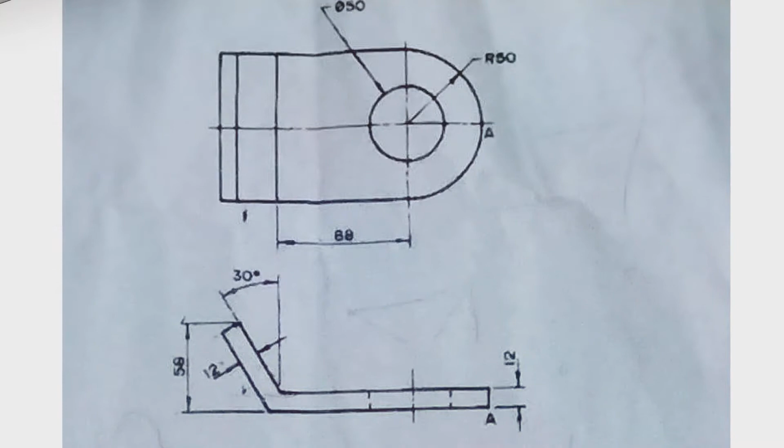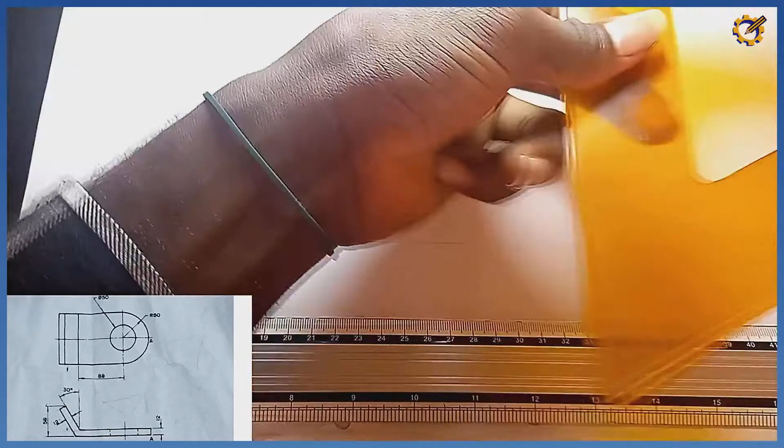Alright, so solving the problem on the screen, the very first thing we'll be doing is we produce a thin horizontal line. For this problem, we'll be applying the principle of isometric curve. After drawing my horizontal line, I'm going to project a vertical line in this order. After that, I'm going to produce my isometric plane towards the right and left hand side like this at 30 degrees. So I'm using the 30-60 degrees set square.

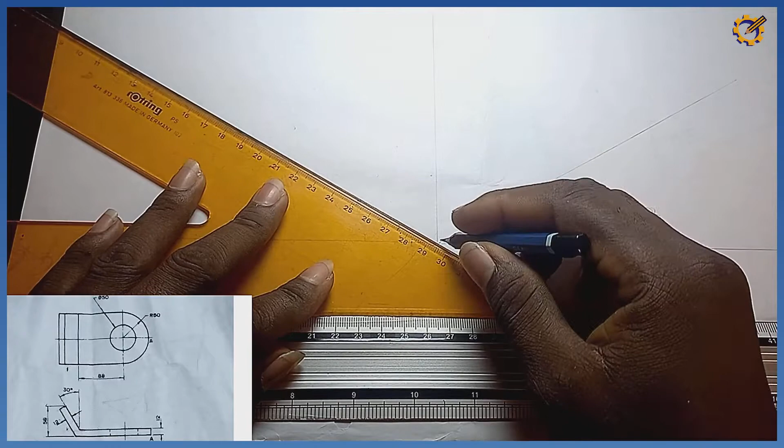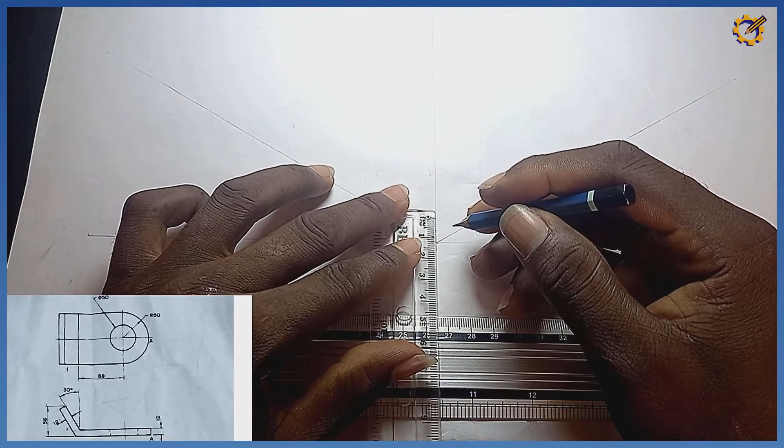So that is that about that. Then towards this axis also, I'm projecting this at 30 degrees also. After doing that, next is for me to pick my length. We take point A as our lowest point. So what does that imply? That implies that right here on this vertical axis, I'm measuring a mark of 12, which is this mark of 12 right there.

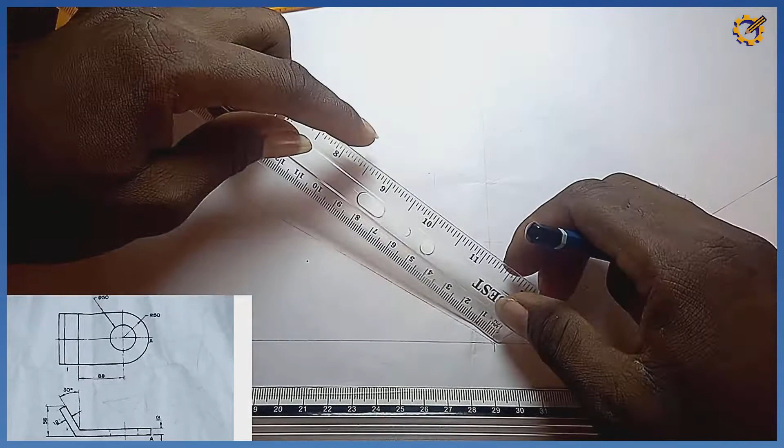Then towards my right hand side, I'm picking a mark of 100, which is this. I'm marking mark of 100, which is that. Let me also take mark of 50, which is this. Then towards my left hand side, I'm picking first of all mark of 88, which is this. Next thing is I'm going to pick my set square now.

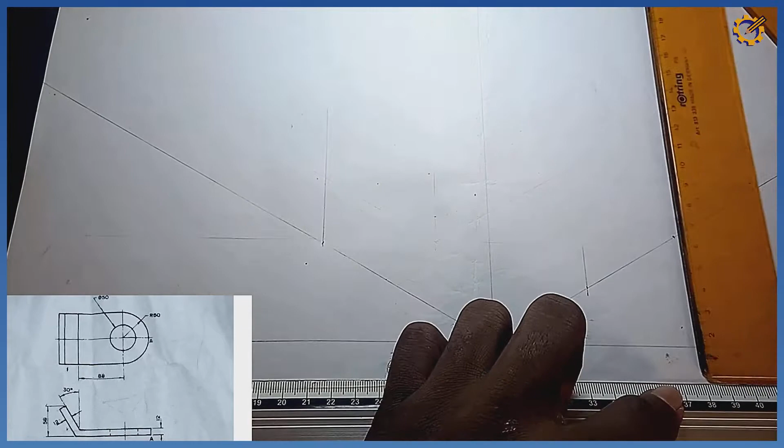So those marks I pick, first of all this mark of 88, I'm projecting that vertically like this. This mark of 50, I'm projecting that vertically also, and this mark of 100, I'm projecting it vertically. Likewise this mark of 12, I'm going to project that on my isometric plane like this. So likewise I'm drawing this like this.

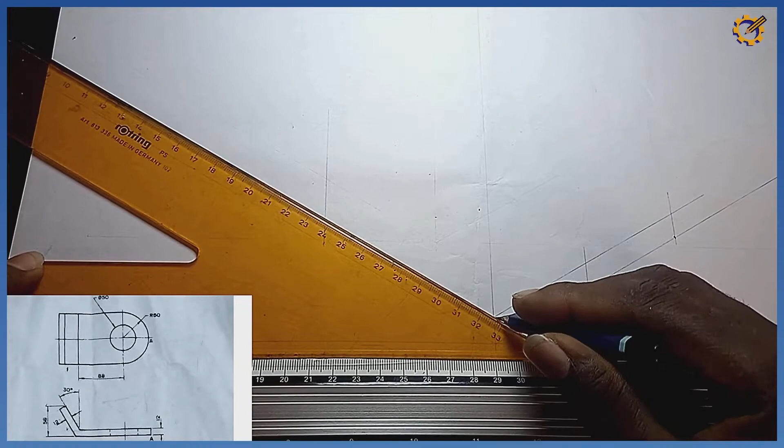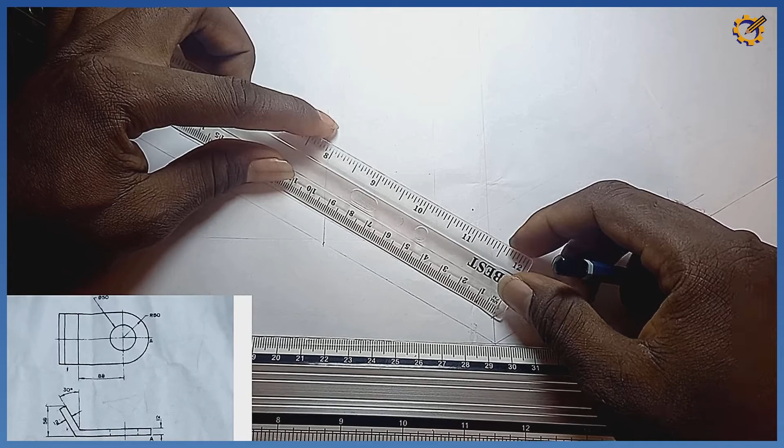In that order. So let's develop the circle here, the isometric curve here first of all. We are told that the radius of the circle is radius 50. So I'm going to pick my ruler. Towards this axis also, I'm going to measure 100. From here now, I measure 100 on this plane. Then in between 0 to 100, I pick mark of 50, which is this.

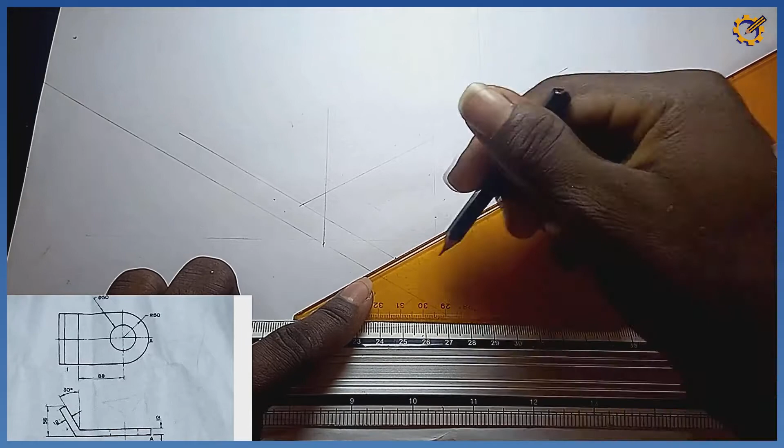Having this mark, I'm projecting them on the isometric axis. So mark 100 on this area like this. Mark 50 on this area like this. Then this edge here, from the end here, I'm projecting that also like this. So that is it over there. I need to erase this off. I don't need this, I'm taking this off.

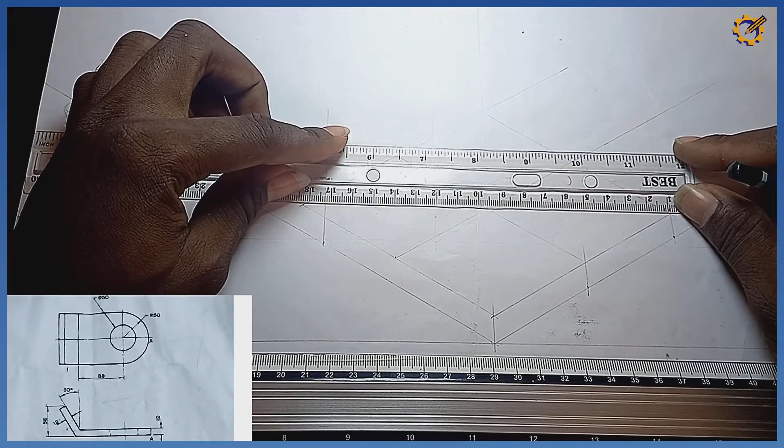What's the next procedure now? This midpoint here, I'm projecting it isometrically like this, with my 30-60 degree set square. After doing that, I'm going to pick my ruler. I'm going to join the longest diagonal, which is here to here. I will draw with thin line first.

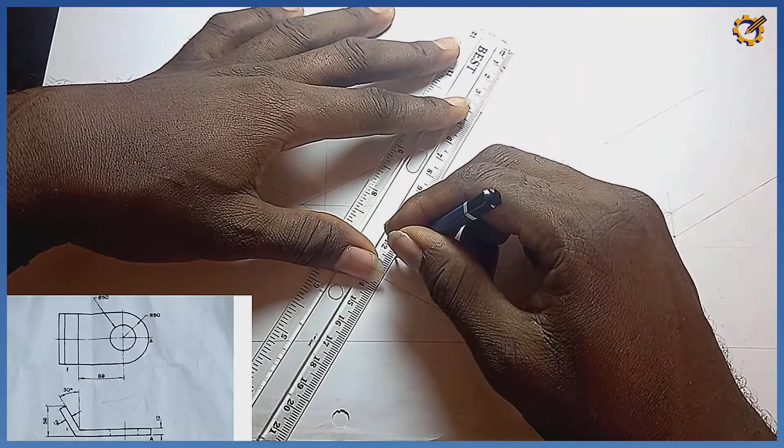After that, I'm going to pick my ruler also. From this edge here, from that intersection right there, I draw down here to the midpoint like this. You see that? Make it thin. Then from that same end, I draw to this area like this. After doing that, what's the next thing? The next thing is to pick my compass.

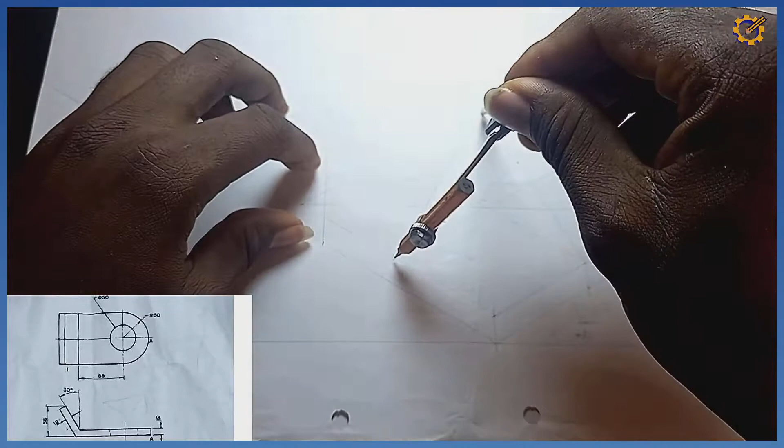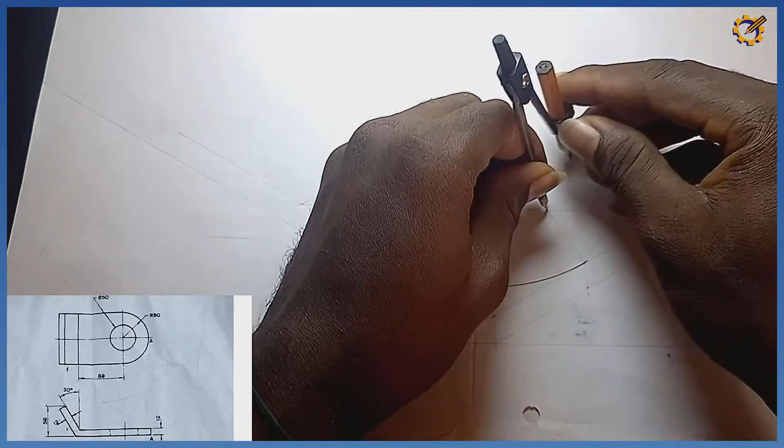Picking my compass, I sit right here at that junction. Then I turn my compass down here to this area, and I draw. Then at this intersection where my lines meet here, take note. Placing my compass right there, extending it to this area here, I draw as it is. So that area is settled at the top.

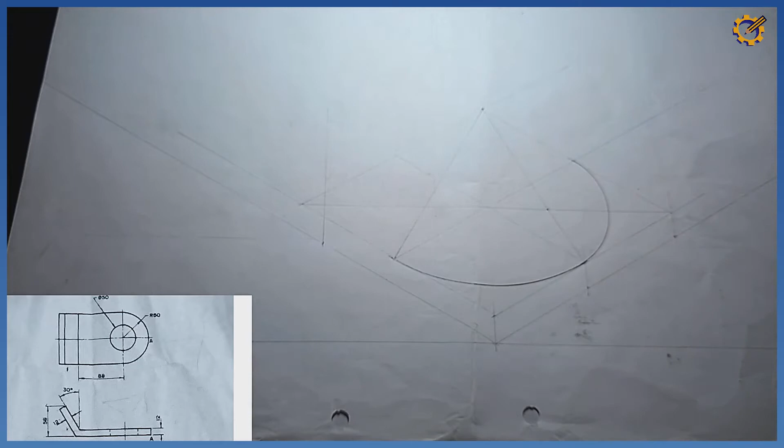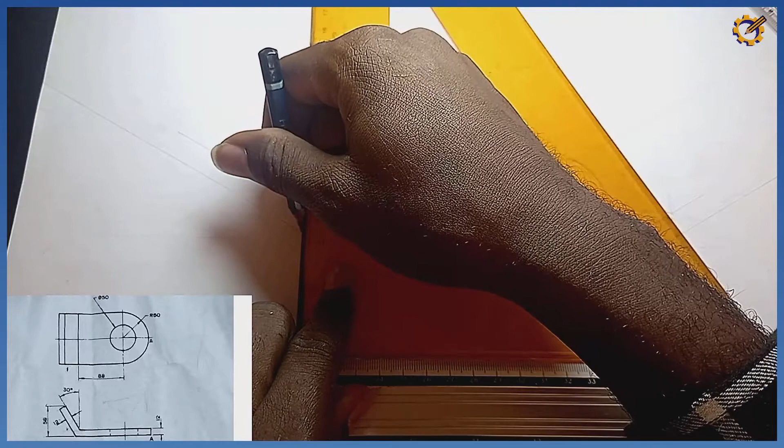So I'm going to replicate the same thing on the bottom part there. How do I do the bottom part? Just follow me. Picking my set square, likewise I'm going to project this point downward like this. I'm projecting this edge here also downward like this. Then I'm drawing this likewise like this.

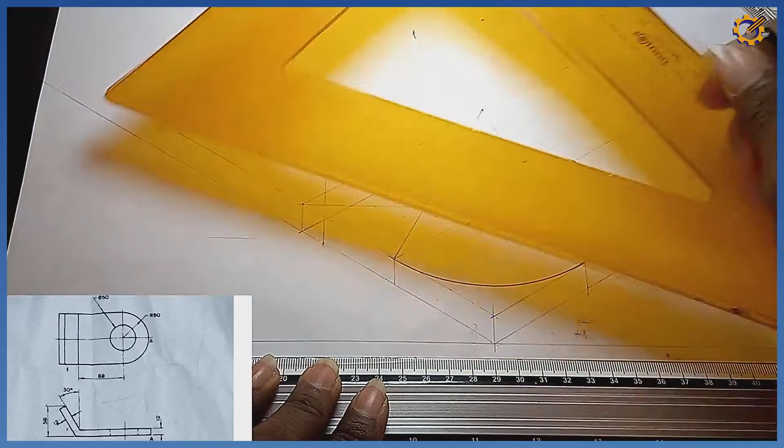Just take note of those things I'm doing. From this end here, you see the way I bend my set square, I'm drawing this like this. As it is over there now, I'm joining this also like this, and I'm joining this also like this, straight away to the back right there.

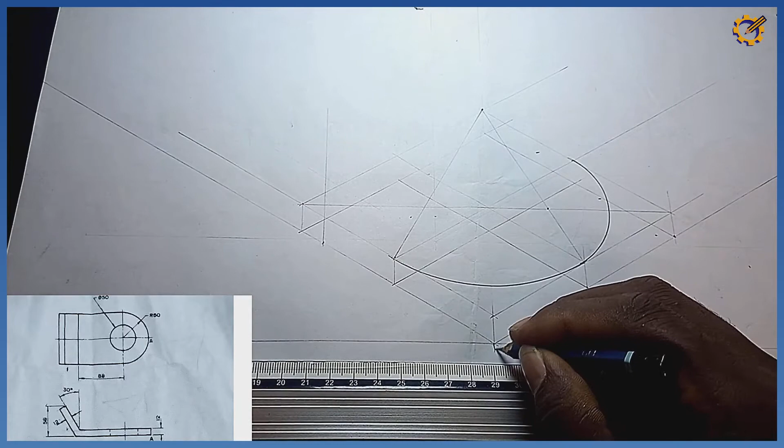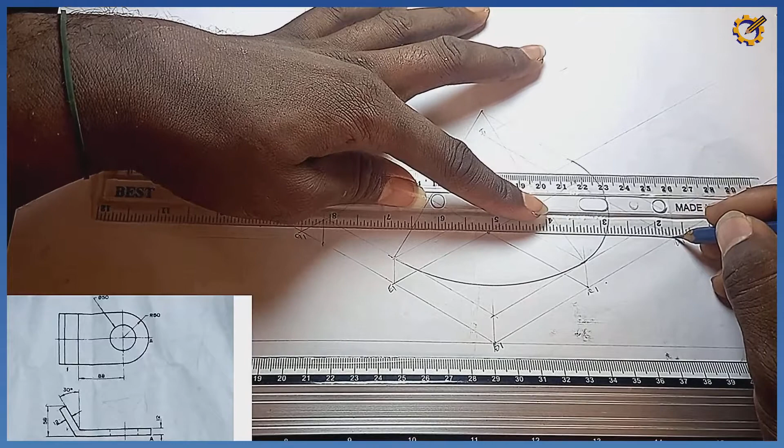After doing that, take note, I will call this area my B1, C1, D1, E1, F1. Take note of this midpoint. G1, H1, and I1. So I'm going to join G1 to D1, which is this. I join it like that. Take note of that.

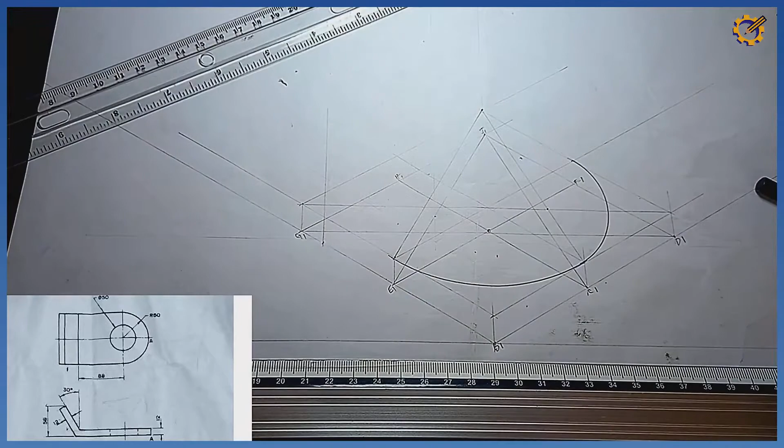Now I'm going to join F1 to E1, which is this. Then F1 to C1, which is this. What is the next procedure? I'm going to pick my compass right now. I'm going to stand at F1 to E1, which is this. Now I'm going to draw. Make it thick.

So I draw. Standing at, take note now, this line C1 to F1, where they meet right here at this junction. Take note, at this junction right here. Standing right here, extend my compass to C1. Then I draw.

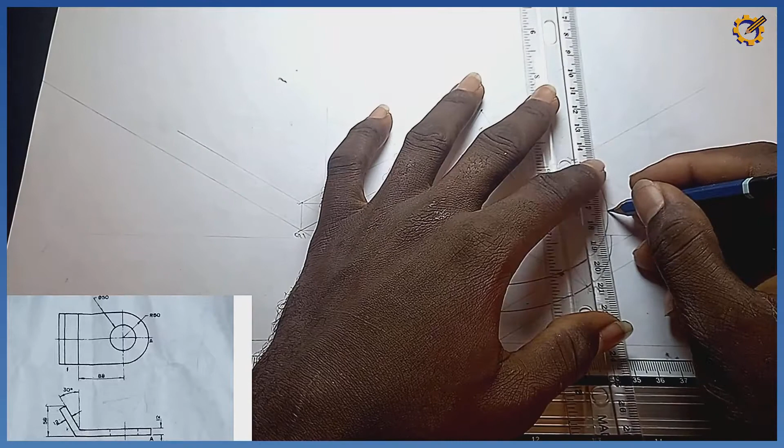So drawing it to that level, I'm going to join this to this with my ruler like this, straight. You see that? Like this. Okay, so that area is settled like that. So it remains the circle on the inside. So the circle on the inside is diameter 50. Diameter 50. So take note of this now.

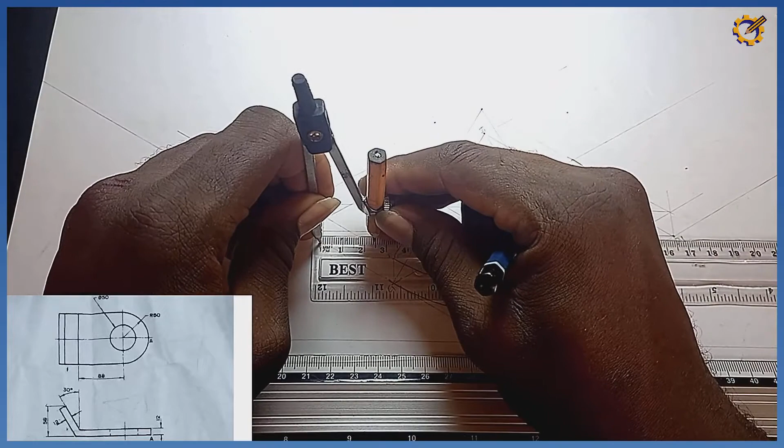I'm going to pick my compass. That will be radius what? Radius 25. I measure radius 25, which is this. With this radius 25 now, standing at this midpoint here. You see that midpoint right there. So standing right here, I mark like this. I mark towards the back also. I mark towards this area, and I mark towards this area. So do you take note of those points?

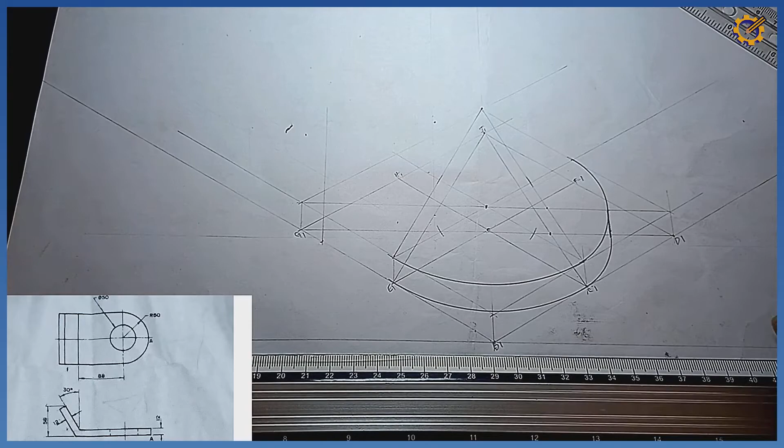All right. So the next thing is for me to pick my set square. Okay, picking my set square. So this first mark right here, this area here, I draw it straight away isometrically. All right, take note of that line. So you need to open your eyes very well so as not to make a mistake. So this second part, which is here, I'm going to draw down also isometrically like this. So take note of that line also.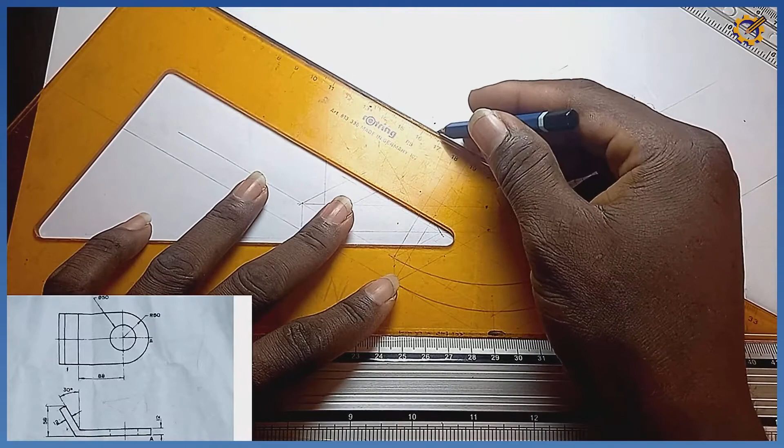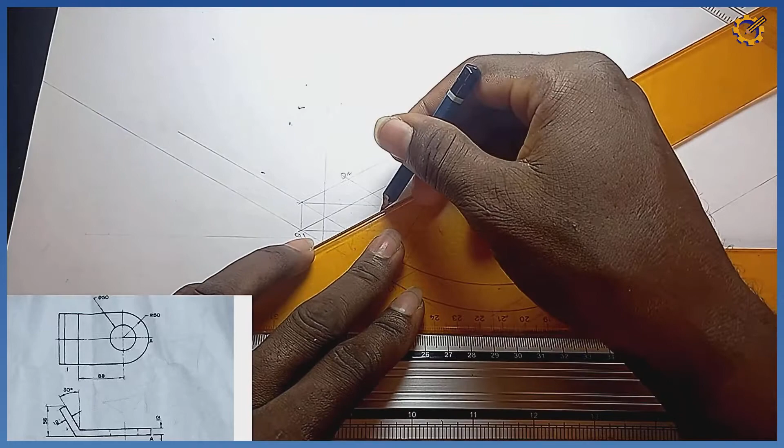So I'm having what? This, let me call it O1, O2. Take note. All right, then on this axis right here, where we mark at the back here, I'm having it here. And do you see that? So 3, then this mark that we mark here, I'm having it isometrically right there also to be 4. Okay, so this is it now. So let me help you to denote it on your own sheet over there. Please don't shade. I'm only doing this for you to take note.

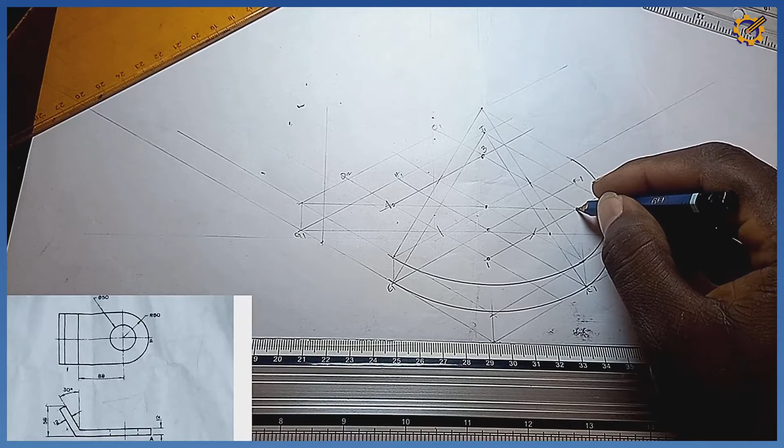So look at that junction, this junction, followed by this junction, then followed by this junction. Take note. So I can name it 1, 2, 3, and 4 for you. So do you see it now? So as it is now, we already have our longest diagonal joining it, which is here to here. Okay, so the next thing I'm going to do is name this point 5, 6, 7, and this area point 8.

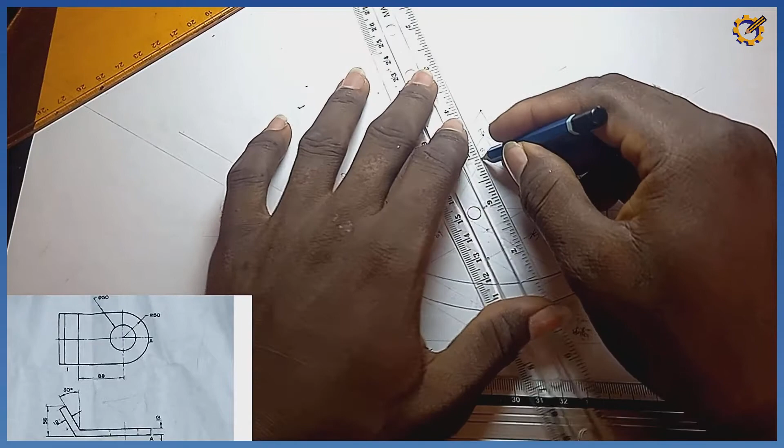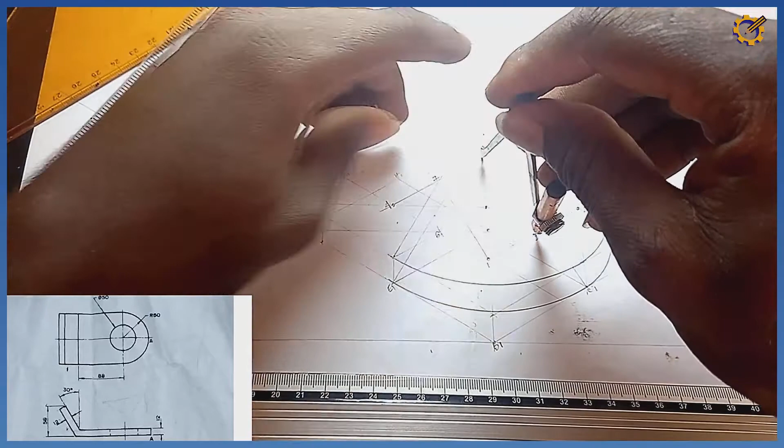Okay, as it is now, I'm going to join point 3 to point 6 like this. I'm going to join point 3 to point 5 also like this. Okay, do you see that? Alright, so I'm going to join point 1 to point 7. Now I'm going to join point 8 to point 1 also. So what's the next procedure? Now I pick my compass, I place it on mark 3, I extend it to mark 5 like this. So then I draw. Do you see that? I draw.

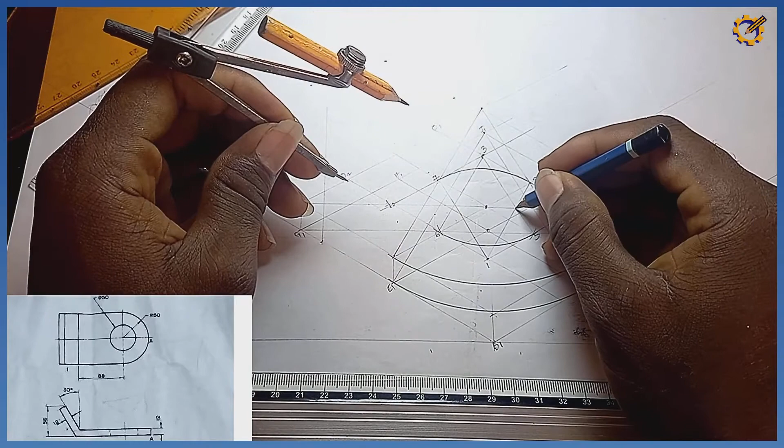So next is I'm going to stand on mark 1. Extend my compass to mark 7. So 7 to 8, I join 7 to 8 together. So then I stand at this junction. See this junction now? I stand at this junction. I extend my compass to point 5 right here. With point 5 I draw. Do you see that? I draw. Then I extend it to this junction also. And with that same dimension I join right there also, as you can see on the screen right there.

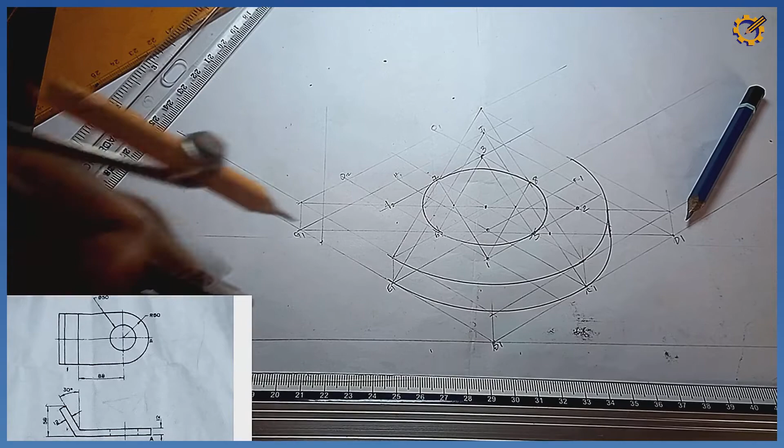Okay. So picking my compass, I'm going to stand right here. Extend my compass to this junction here. You see that? And draw this out like this. So that is it over there. Okay, so right from this junction now, check this. From this bottom to this area is mark of 88.

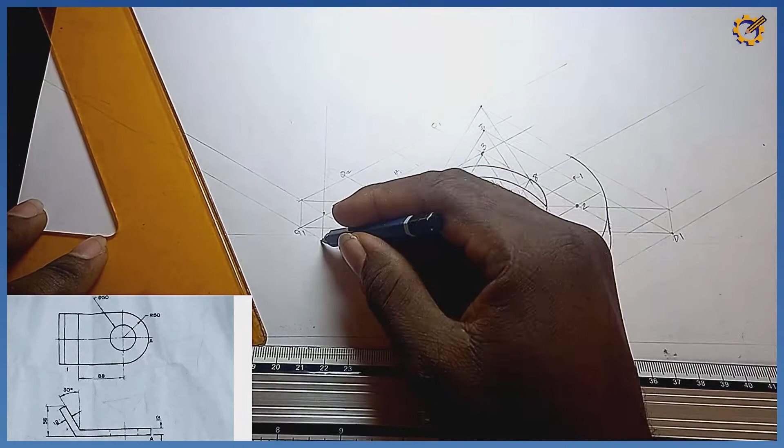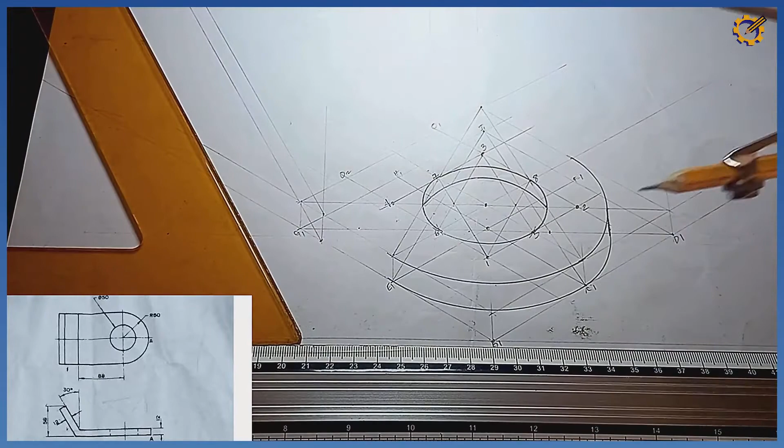Okay, pick your set square at 60 degrees using the 60 degree set square. You see, I draw this line like this upward. So then from the bottom part also, I draw this one also upward like that. You see that? So after drawing these two, the next thing is I'm going to pick my compass. You can see towards the height here. The height here is 56. I measure height of 56 as my height. I stand right here. I mark this arc on this vertical line here.

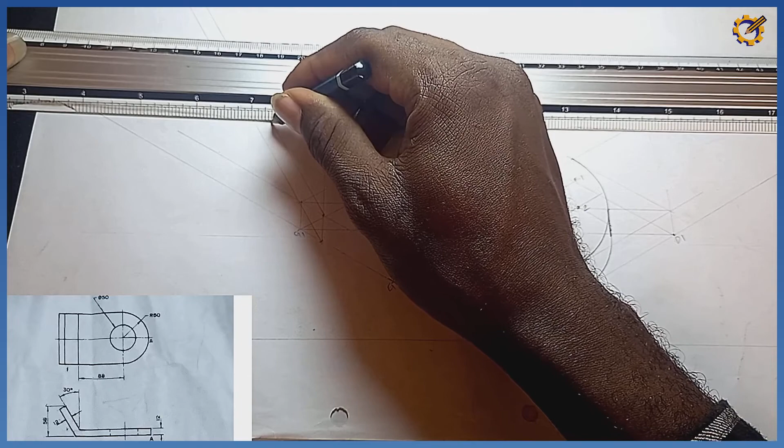So on that vertical line, I pick my T square. I project this mark as it is now to the back faintly, touching this point here. So touching this point here, ensure you are drawing this correctly. So with this mark now, here to here is also 56 as it is. So after doing that, the next thing is pick your 30-60 degree set square. From this junction, I draw this as 30 degrees right here. Then I project it straight away down there.

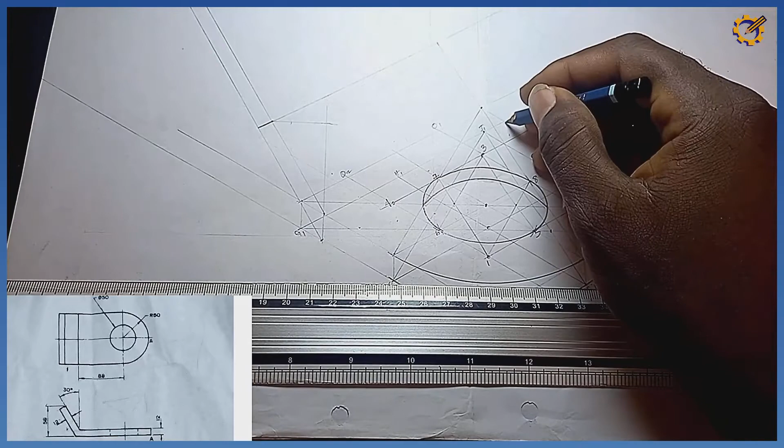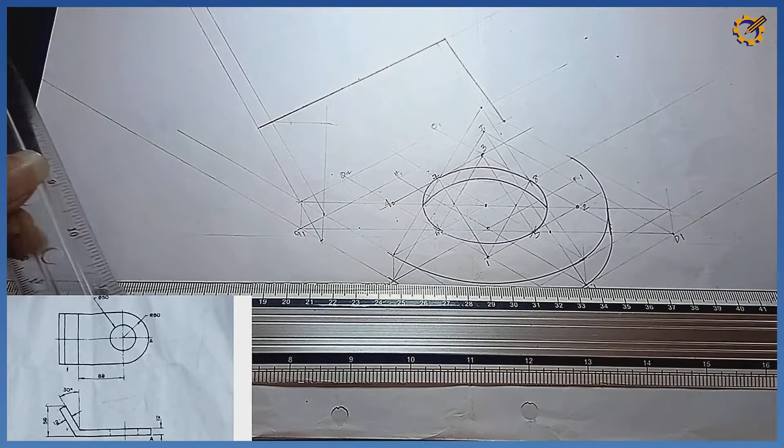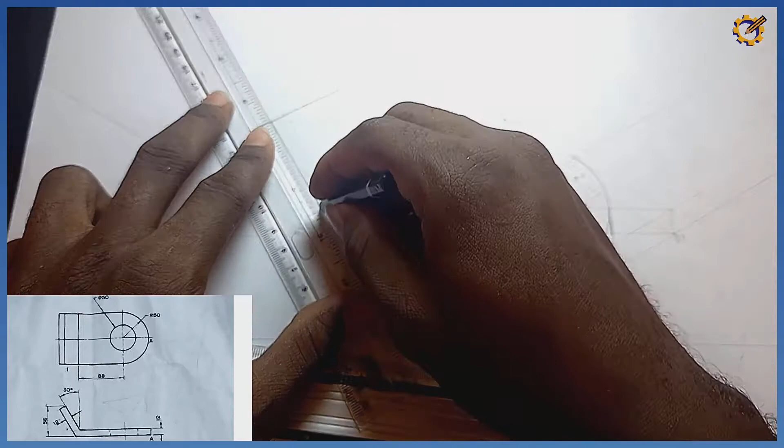So then from this point here, with your 60 degree, you slide it right there and draw it boldly. Okay, that is it over there. Then you pick your ruler, you join this area all together like this. Okay, that is how the area is going to look like. Then this area is going to come from here to here like this. This one is going to come from here down here like this. Then you take this with your ruler down here like this, and you take this like this.

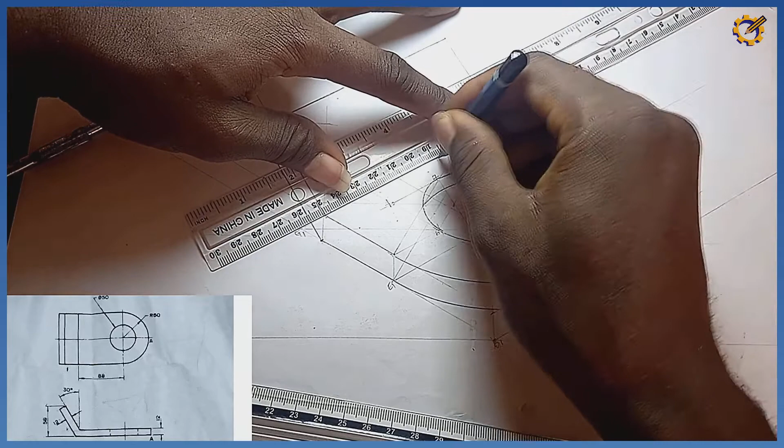Okay, then I draw this from here down here like this. Then from this junction I draw this down here like this. Okay, so that is the production of the object on the screen in isometric drawing.

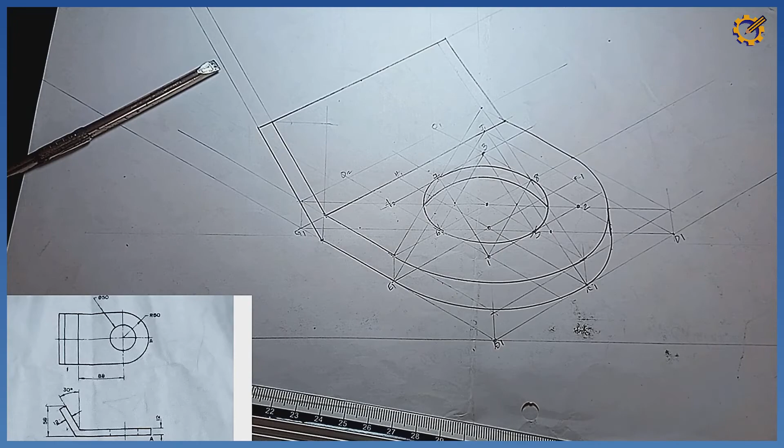And also this area is going to come this way. Sorry, this end will be here like this. That was an error on my part. It's going to be like this, while this area will be erased from it. Okay, erase this part out of it. So that is the projection of the object on the screen right there.